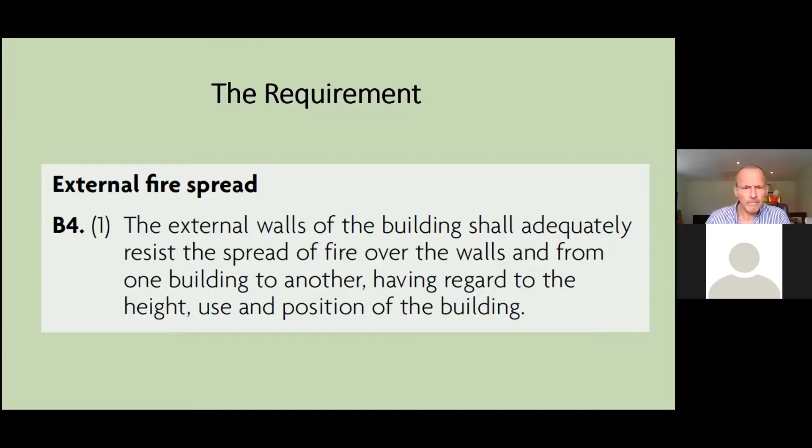I'll give my thanks to Les for sourcing and adapting this useful diagram that demonstrates the principles. Let me bring up a pointer here. It's useful to demonstrate: we've got a burning building there, and we've got some assumed fire loads and fire intensity, depending on the use of the building. That's either a reduced intensity of 84 kilowatts per metre squared for offices, domestic, assembly and car parks, or a standard fire load for shop, industrial buildings and storage of 164 kilowatts per metre squared.

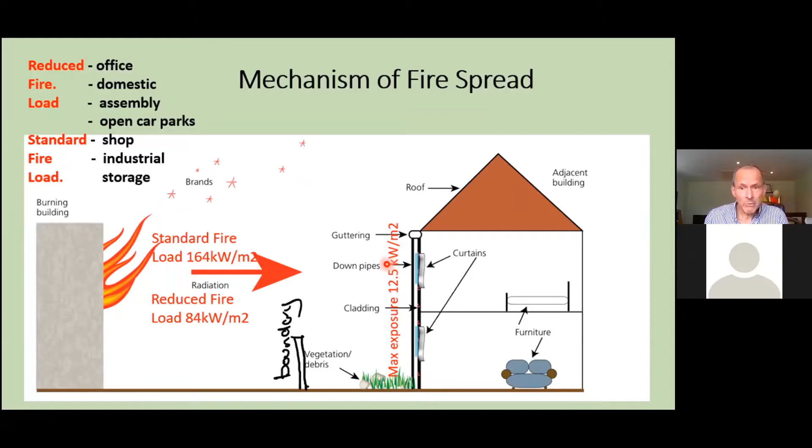The aim is to space buildings from the boundary to prevent radiated heat from exceeding 12.5 kilowatts per metre squared at the face of the opposing building. That's the theoretical heat intensity at which wood exposed to it will reach a pilot ignition temperature in about 10 minutes, allowing a burning ember floating over from the building on fire to start a new fire through pilot ignition.

Now, something important to bear in mind before we discuss the building regulations requirements relating to unprotected area limits, meaning limits on the total areas of doors and windows that face a boundary. When we specify a boundary distance based on Approved Document B guidance, we're basing it on an assumption about any building already in existence or that may be built on the adjacent site.

The assumption used has been that the two adjacent buildings would be identical, effectively mirror images of each other across the site boundary. In other words, the distance needed to the site boundary is the boundary distance A, which equates to half the separation distance, 2A. And 2A is the distance necessary to keep the radiant heat intensity at the face of the opposing building from exceeding that critical 12.5 kilowatts per metre squared limit.

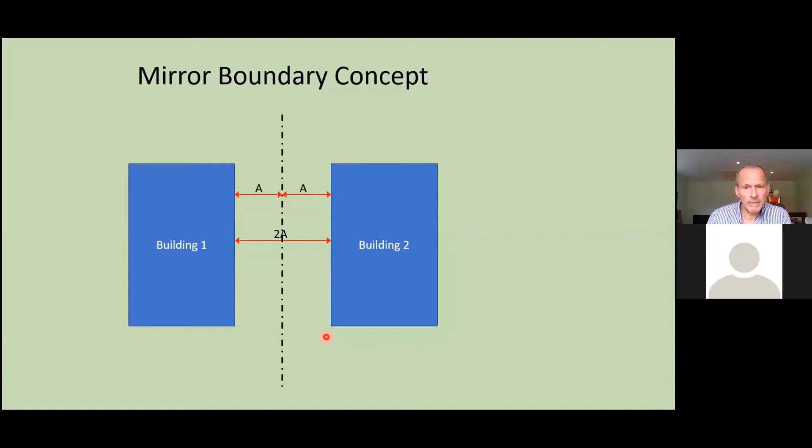So let's imagine a scenario where initially we get a small building, say it's a house, built on a piece of land, and the building regulations guidance based on the amount of unprotected area, i.e. windows etc, in that elevation facing the boundary dictates a distance of A from that boundary to comply with the regulations.

This is based on the premise that a similar scale building may be built on the adjacent plot with a similar boundary distance, so that at a separation distance of 2A, the heat radiated from a fire from either building will not exceed that critical 12.5 kilowatt limit at the face of the opposing building.

All well and good, but let's imagine a scenario where a few years later permission is granted for a much bigger building. We'll call it building 2, and taking an extreme, maybe it's a large warehouse with large volume fire compartments and a high fire load, thus requiring a greater distance to the boundary when referring to the national guidance.

The problem is that using the mirror theory, the separation distance, 2 times the boundary distance, works for the first building, but for the second building it's going to fall short of what is needed to restrict radiated heat from a fire in building 2 to 12.5 kilowatts per metre squared at the face of building 1. The building is too close. So whilst building 2 might on the face of it appear to meet the guidance, building 1 is now compromised in terms of fire safety.

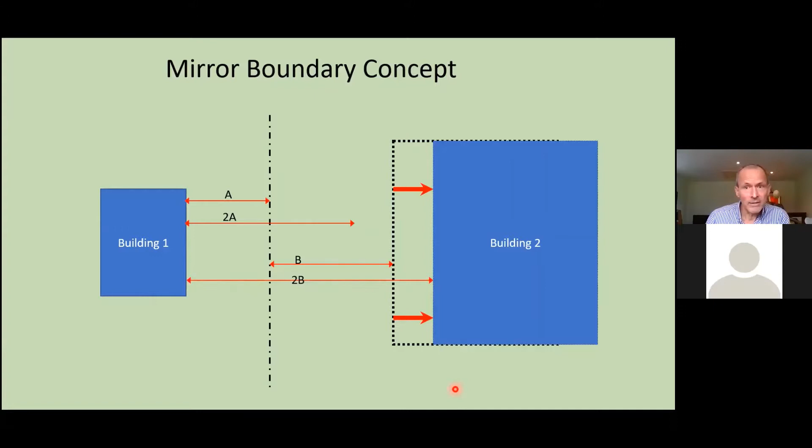So I hope that was reasonably clear.

Another anomaly I'll mention before we go into detail is that the rules we'll be discussing were based on buildings that were not as well thermally insulated as they are now. A BRE report commissioned by the government in 2015 advised that improving the levels of thermal insulation to those recommended by Approved Document L1A, Conservation of Fuel and Power in New Buildings, may lead to higher fire temperatures. These can be compensated for by reducing the unprotected area of an elevation by 70%.

70%, wow, that's quite a factor, isn't it? And it's worrying that nothing changed since that document was published, even though we recently had an amended approved document B published. So there you go. I don't know quite why there was no response to that report in the approved documents, but maybe it's still to come. We will see.

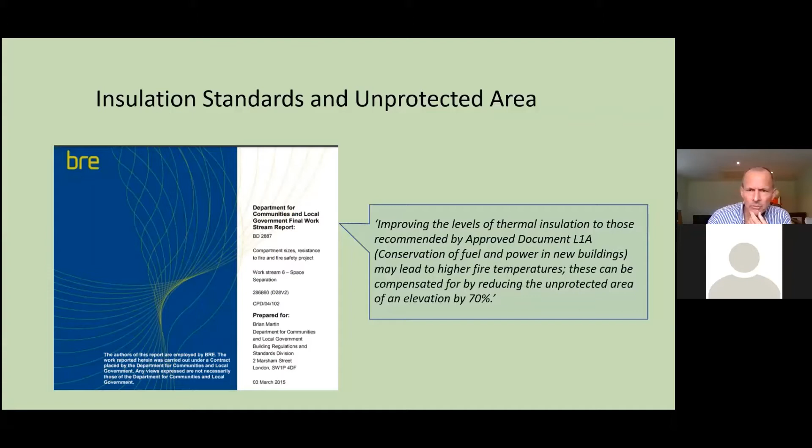All right, enough of background. Let's discuss the actual requirements that determine compliance. One of the first steps we take when checking a plan in accordance with approved document B, or the BS 9999 series, is to establish the fire resistance that's necessary.

Dependent on the height of the top story or the depth of the bottom story, and whether suppression by sprinklers is fitted to the building, we look at Table B4, the reference for determining the level of fire resistance needed. For example, Table B4 shows a dwelling house with a height not exceeding 5 metres has a fire resistance requirement of 30 minutes. The little symbol there relates to the need for 60-minute fire resistance for a party wall. So there you are - we work out from that table what fire resistance is necessary.

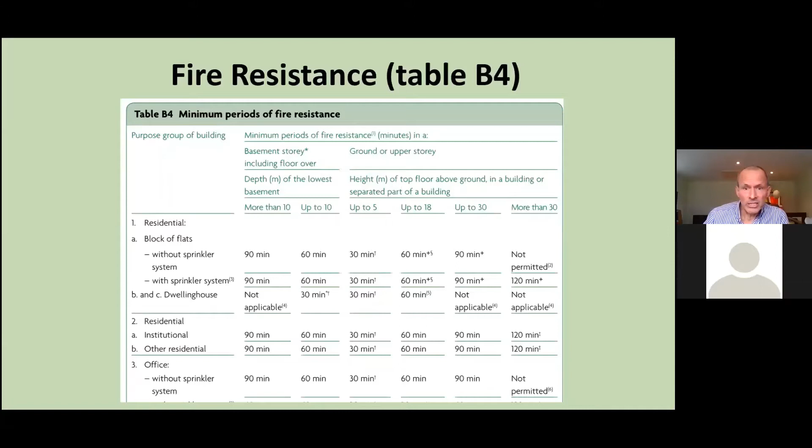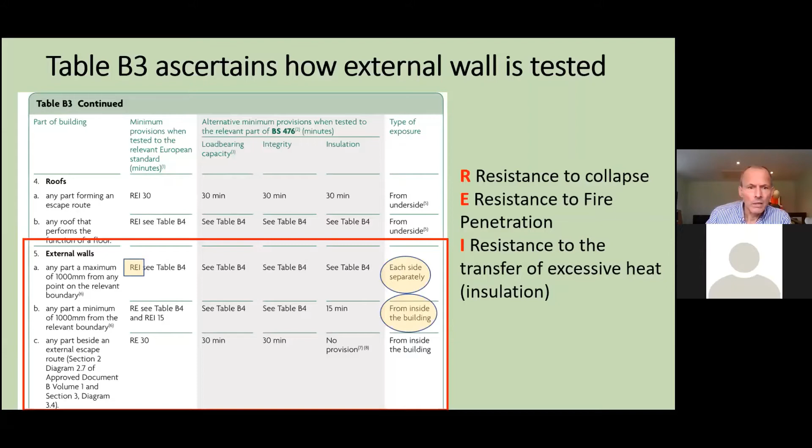So knowing that, we can now look at how we define unprotected area. I did say it's windows and doors in an elevation, but it's a bit more than that. It says that parts of an external wall with less fire resistance than the appropriate amount given in Appendix B, Table B4, are called unprotected area. We've just seen what the requirements are, so if you're not hitting those requirements, then we would call it unprotected area.

And even if you do hit those fire resistance requirements, clause 13.7 says where a fire resisting external wall has a surface material that is worse than B-S3-D2 and is more than 1 millimetre thick, then that part of the wall should also be classified as an unprotected area. However, we only use half its area when doing the calculation.

So you see there the B, S3, D2 rating - that's the Euro equivalent of Class 0 when we were looking at the old BS 476 Part 6 testing. The B relates to the combustibility class, the S is the production of smoke, and the D relates to the production of flaming droplets - the lower the number, the better. So what 13.7 says is that even if the wall has the required fire resistance, you still need to consider any combustible claddings and factor those in, allowing 50% of the actual in the calculation.

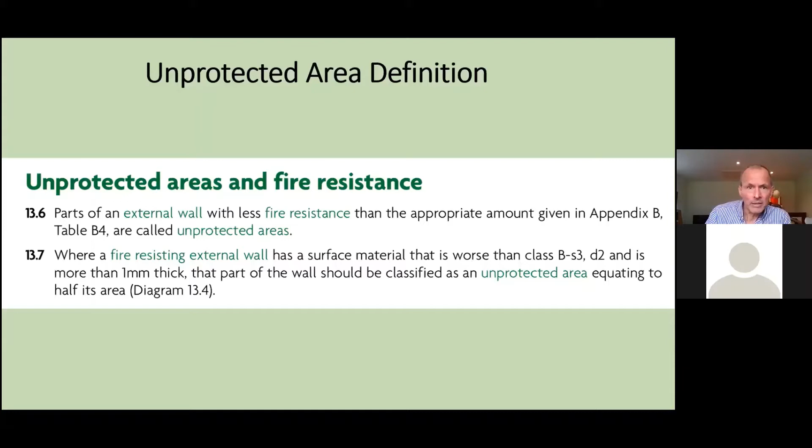So diagram 13.1 illustrates the methods that I mentioned in Table B3. In other words, when we're close to the boundary, we're looking for a very limited unprotected area, very small amounts. As soon as you get away from the boundary, then you can have a limited area of unprotected area.

And then there comes a point when you've got a distance whereby the whole wall can be unprotected area, no provision at all. I say that, but the wall might need fire resistance because it might be supporting a floor, so it might be an element supporting another element of structure that itself must be fire resistant. So you can't necessarily give no fire resistance to the wall.

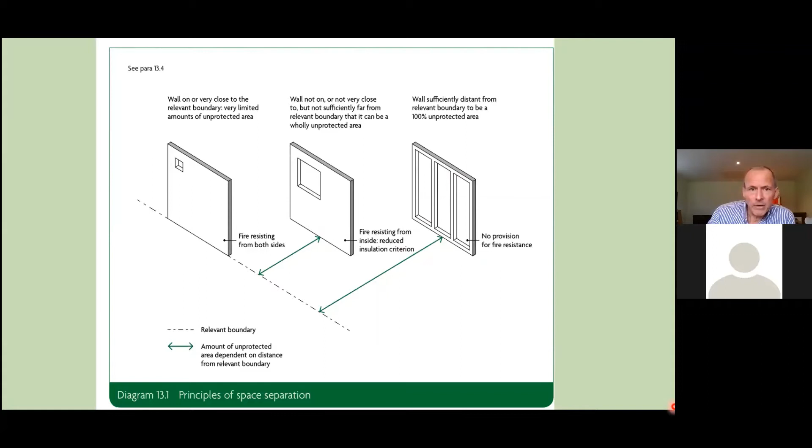Unprotected areas that can be ignored because we don't have to include every single window or surface as being a risk in terms of fire spread.

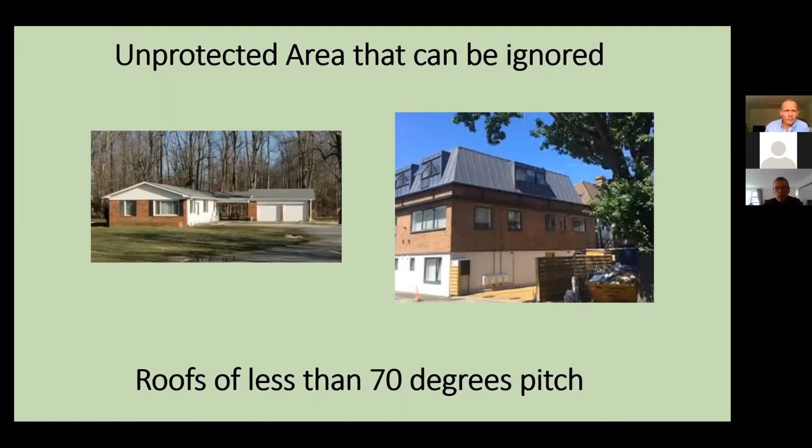This slide shows that roofs less than 70 degrees pitch can be disregarded, like the nice shallow roof bungalow on the left. Most roofs are at less than 70 degrees, so we don't include them. But occasionally we get a mansard roof like the one on the right, and because that's over 70 degree pitch, we have to include it in the calculation, along with those dormers.

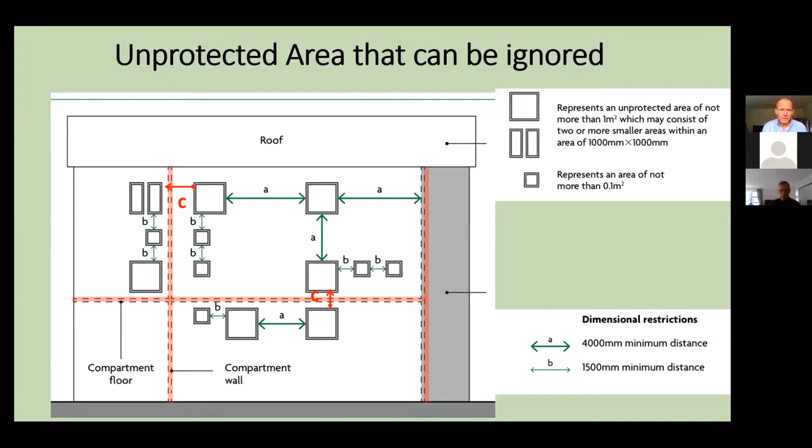Les is going to go into more detail on all this, but I'm just going to go through the simpler methods. There are 4 common methods for calculating the required boundary distance in the building regulations and associated documents. Method 1 is in ADB, just a simple table, relating to small residential buildings not more than 3 stories and 24 metres in length.

We've got method 2, also in approved document B. This is called the enclosing rectangle method, and that covers other buildings up to 10 metres in height, but excludes open-sided car parks — can't include that in that method.

There's methods 3 and 4 — 3 being based on BRE 187, an enclosing rectangle method that's slightly more finely tuned, and 4 called the aggregate notional area, affectionately known as the protractor method, that a lot of people know about but few have actually ever undertaken. You're going to learn about those in the following slides.

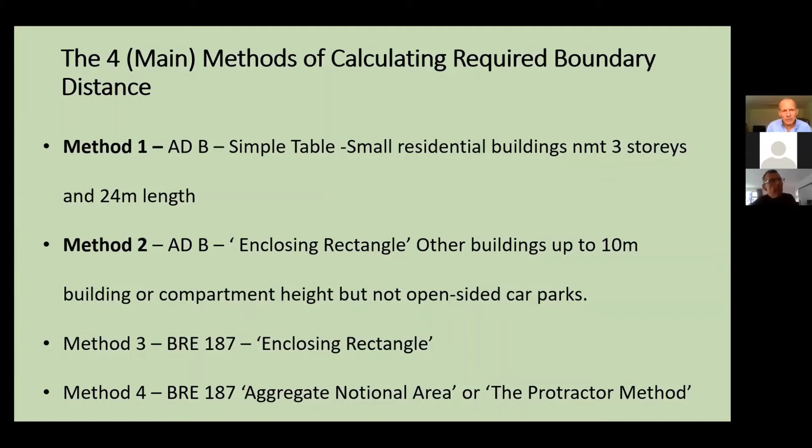So certainly when we're checking unprotected area in a design, we may check using method 1. If it doesn't work, we will use method 2. We might then ask the designer to present a method 3 or 4 assessment to demonstrate compliance.

Here's method 1, a really simple table. It's just a case of checking that the area limits in the table aren't exceeded, depending on how close the wall is to the relevant boundary.

So at 1 metre distance, you're allowed 5.6 metres squared. As soon as you get over 2 metres, you're allowed 12 metres squared, and so on until you get to 6 metres, where there's no limit on unprotected areas.

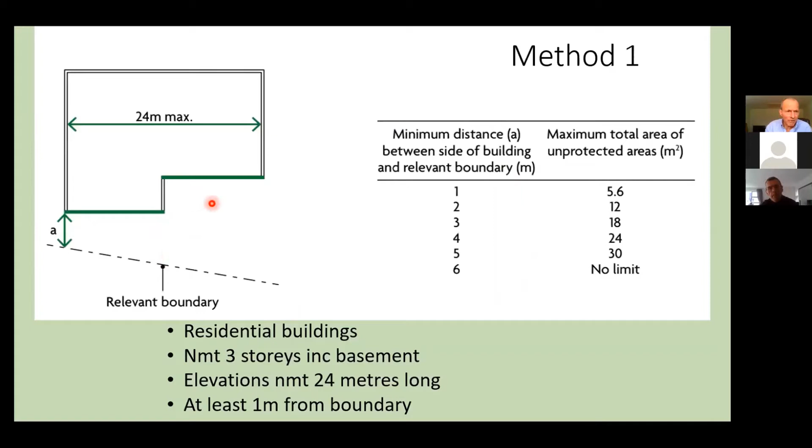You'll note the phrase relevant boundary, the minimum distance to the relevant boundary. The question is then, what makes that boundary relevant for consideration in relation to that elevation? I'll quickly go through a slide to show you.

For an elevation fronting a road, as a lot of people know, if it's a road, it may be a river, it may be a canal, there's not going to be any development there. So we can take the relevant boundary as being to the centre line of that feature.

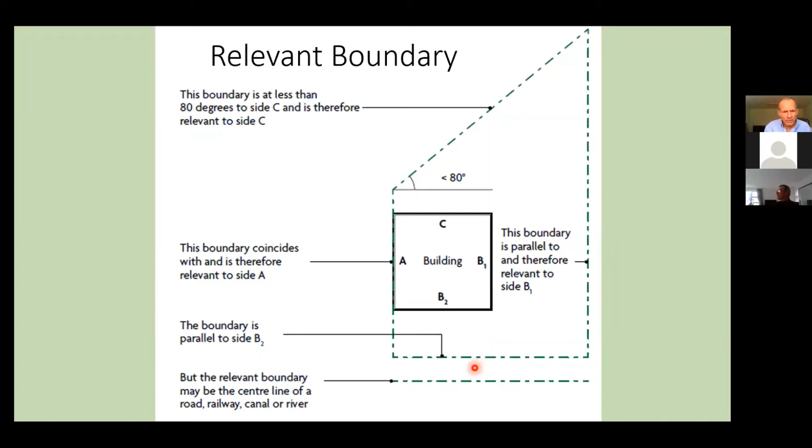You may have also heard the phrase a notional boundary, and we use that where there's more than one building on the same site. So not where you've got houses with distinct boundaries, but maybe it's an industrial estate or a hotel complex with outbuildings.

That applies when at least one of the buildings is within the residential or assembly and recreation purpose groups, or it's going to be operated or managed by different organisations. In those situations, we say a notional boundary exists, an imaginary line between the two buildings.

That line is set at a distance such that both buildings will comply with the unprotected area limit. In other words, it's within the allowable limits given for both opposing buildings, and as long as that's the case, the buildings will comply.

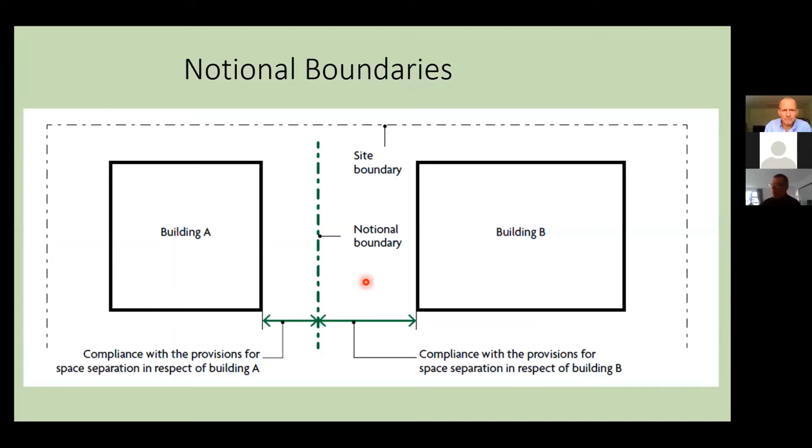In a domestic situation, it's often overlooked that these notional boundaries can exist, because you might have a non-exempt large shed or a garage over 30 square metres, controlled under the building regulations. Maybe it's a car barn—they're quite popular on housing estates now because they're compact space-wise.

If they're in proximity to the main house and don't achieve the minimum fire resistance, you might have to assume a notional boundary between them, as in this diagram.

In this case, it's a dwelling house with a semi-detached garage over 30 square metres facing the dwelling. So you have to run the calculation for that elevation, which might have a door area or something like that, so there's a risk of fire spread between those two buildings. As I say, occasionally overlooked.

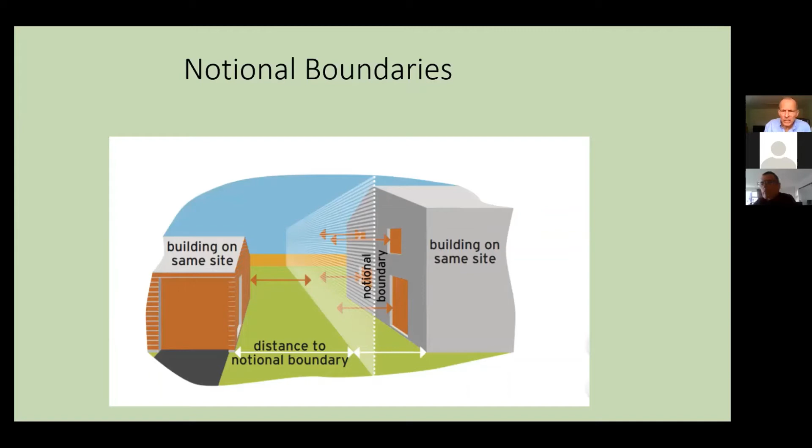And finally from me, method 2, which is in ADB, another relatively simple calculation process you might go to if method 1 doesn't show compliance or can't be used because the building isn't suitable for that method.

With this method, we look at the total unprotected area expressed as a percentage of the total area of the elevation. Then we've got a table in Approved Document B that shows the required boundary distance, depending on whether it's the lower or higher fire load.

So in this instance, we need 15 metres for the higher fire load, whereas we only need 7.5 metres for residential buildings, based on a maximum percentage of 60% of the enclosing rectangle.

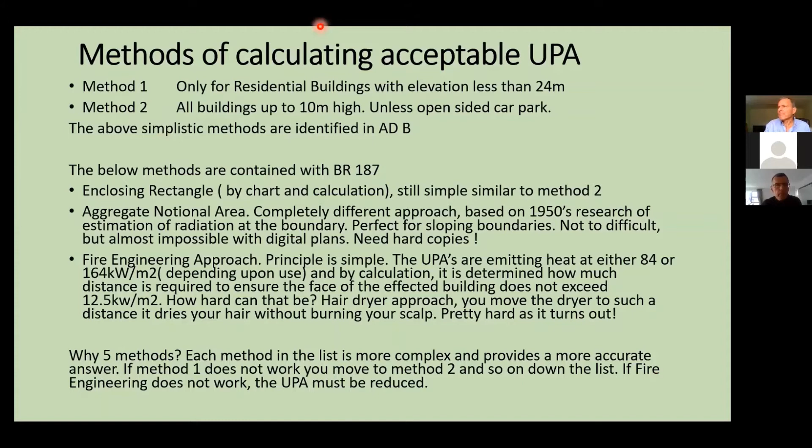Let's see if I can share this screen, Trev. I think that's half the battle with this. How's that, is that looking good? If you press run and then go to your slide, I think you're in business, Les. Can you see the... Sharing, yeah.

From current slide? Yes, I think if you run it. Is that up and running? Can you see the slide? Rachel, are you there, can you see the slide? We can see the slide. Yeah, I can see the slide. You've got all your screens down the side as well.

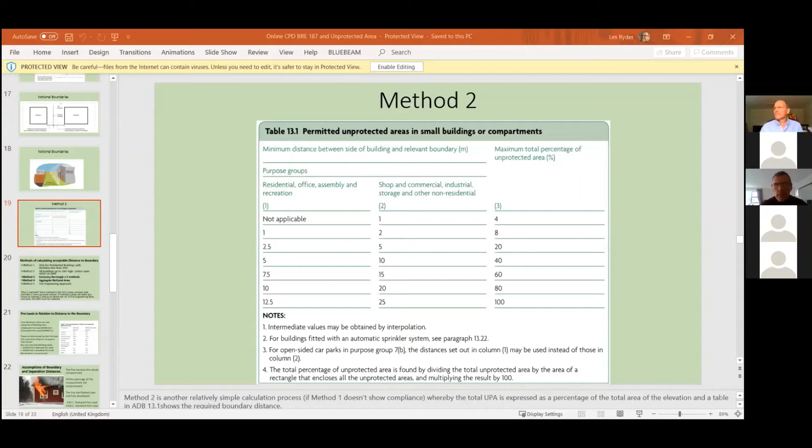No, it's not. Try clicking run slideshow, Les, and then hopefully we'll get started. Either that or, yeah, it says I'm sharing. You are screen sharing, it says that. Les, you might need to click the enable editing button first and then press run slideshow. I don't understand what you're saying because I've got... Did you see the yellow line at the top that says enable editing? Yes, click that.

And then go back to sharing your... I've got your screen now. So go back to share screen. Oh my God. Let's look, share. Yeah, looking good. And now do the slideshow. Is that it? Now go to slideshow and do what you did before to make it go. Make it go, and run the slideshow.

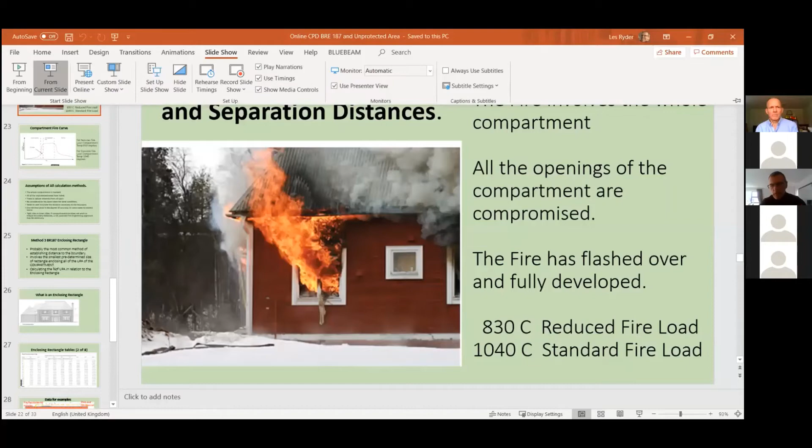See, it's so much easier on an iPad. Yeah, or from current slide. Click, yeah, slide, and I want to be clicking back, don't I? We're good, Les? Yeah, not as seamless as I had started to think, but we're there. I think you'll take it away. Brilliant, now I don't think there'll be anything more silky or smooth than that, Trev.

Right, okay, here we go. Let's see if we can get into the nuts and bolts of it. There you go.

Trevor's identified 4 methods, there's actually 5, which is crazy. But there's 3 levels of fire safety in ADB, BS 9999, and BS7, whatever it is, the fire engineering approach. So there just seems to be a habit of making - if they've got a problem, let's find 6 solutions to it, and unprotected area is one of them. We're going to concentrate on methods 3 and 4.

Obviously, I haven't got the expertise to run you through the fire engineering approach. But the reason why there's 5 methods is predominantly because, like what Trevor earlier said, you start off with method 1, and if method 1 doesn't work, you try method 2. And you're going to find out in a minute, method 2, nowhere in the world does method 2 work. I think they made a mistake on method 2, but we'll run through that in a sec.

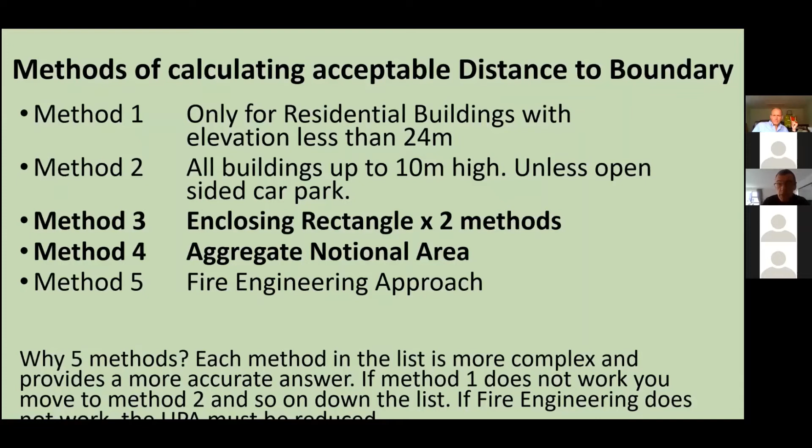You start in method 1 and you get all the way to method 5, and if method 5 doesn't work, then you've got to literally reduce your unprotected area. It's all down to fire loads, just the same as buildings - it's down to imposed loads, different imposed loads for dwellings, for shops, for flats, for industrial buildings. Fire loads is exactly the same, and in ADB terms they're related to the purpose groups.

Now, as far as separation of the boundaries is concerned, there's 2 fire loads that pertain. The first is the reduced fire load, and that relates to domestic, office and assembly buildings.

Open-sided car parks we just found out about a few days ago, and the second one is the standard fire load, which is basically what all the testing was done to. Those are the two heat fluxes that relate to each one. If you did the fire dynamics session a few weeks ago, you'll understand all about that.

And the missus has started cooking and using the microwave exactly when I've started to present. How good's that timing? Anyway, I'm fully embarrassed. That's job done.

Right, okay, well in the old days the purpose groups were designed in relation to kilograms of wood in the compartment, and the cut-off point for those two loads was 25 kilograms of wood in old money.

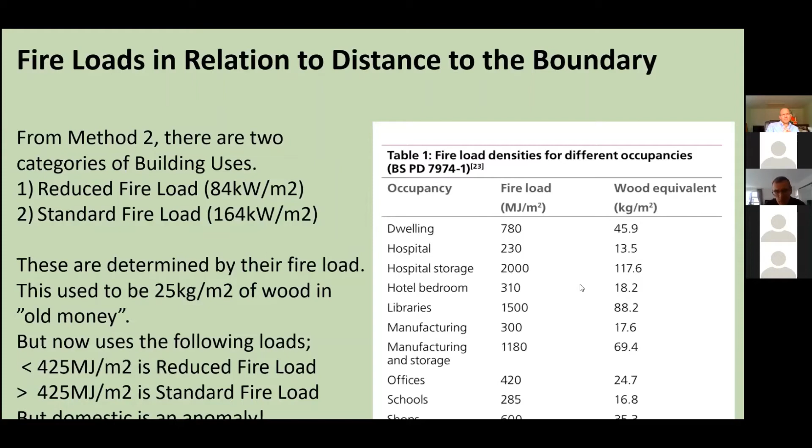But now, obviously, it's in megajoules per square metre. The cut-off point is 425 megajoules. Below that is a reduced fire load, and above that is the standard. There's a table that gives you some fire loads of basic buildings, to give you an idea. But the upshot is there's two different fire loads, and you'll end up with two different distances to the boundary when you do the calculation, and we'll identify how to split them.

The temperature for the reduced fire loads is assumed to be 830 degrees, and for the standard fire loads, 1040. But like Trevor said earlier about insulated compartments, all of the data we're going to use was developed a million years ago, back in the 50s, and all of the testing was done in concrete compartments. Again, if you've done the fire dynamics session, you'd understand the thermal inertia has got a lot to do with the temperature of the compartment.

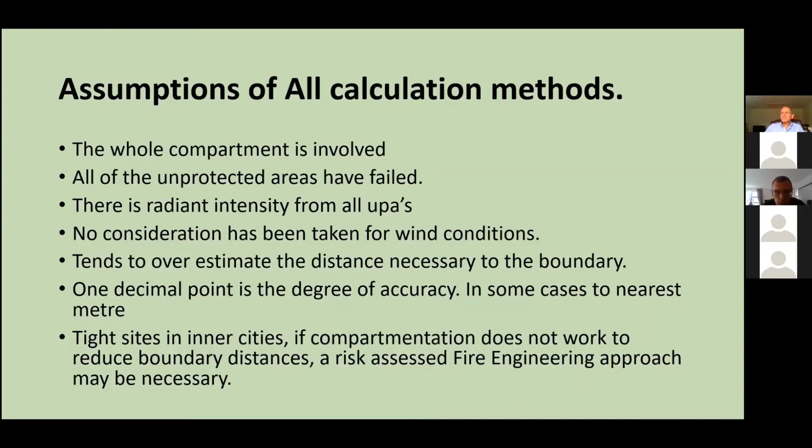So again, sprinklers can make a difference. We'll have a quick chat about that as well.

So what we're going to do, we'll do the enclosing rectangle method first, probably the most common method. It's been in there since 1965, derived from data in the 50s. And I've got to move Trevor's photograph out of the way - there you go, you're at the top right-hand corner now, Trev.

It involves the smallest predetermined size of rectangle enclosing all of the unprotected area of the compartment. Oh my God, I didn't even understand that when I read it. But you're going to get the idea.

It would have been a lot easier if I'd had my iPad, because I would have shown you a little bit. Well, the next slide, hopefully, with a bit of luck - I can't remember what the next slide is, but with a bit of luck that will identify that.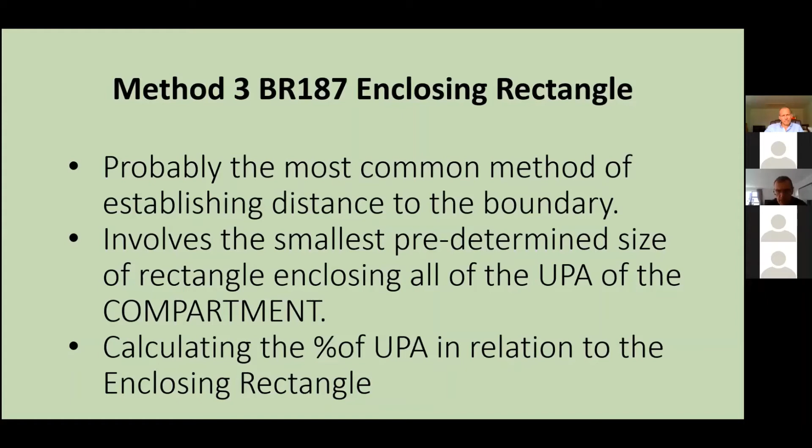And you calculate the area of the unprotected area in relation to the enclosing rectangle. So if you've got 1 square meter of unprotected area and your enclosing rectangle is 10 square meters, then you're at 10%. So it's relatively easy.

What I was going to do on this slide with my iPad was to actually draw where the enclosing rectangle, the minimum enclosing rectangle, would go. It's a rectangle that goes from the top left, the window on the top, on the left-hand side - that's a point - and the top right-hand side.

I think you could lose a pointer if you - I think if you go to your menu you could do what I did, use a pointer with a pen logo. If I lose this screen, who knows? No, you'll be right, just click that pen logo and you'll be able to. Can you see my iPad? Can you see my what they call point? Yeah, I can see that, but you could - yeah, go with that if you want. I might not get back in, Trev. That's what I'm panicking about. It's just a tool, but okay.

So it starts there - that's another point. It goes all the way down to the floor because of the door, and then back around again. That's the enclosing rectangle. It does what it says on the tin.

Now that's the minimum enclosing rectangle, but it gets a little bit trickier than that, because the rectangles we use in the tables are all at 3 meter intervals. So if that there is 10 meters by 5 meters - 10 meters wide and 5 meters - then the smallest enclosing rectangle that we're going to get into, and I have got some diagrams of this in case you don't pick this up, would be a 12 by 6 rectangle.

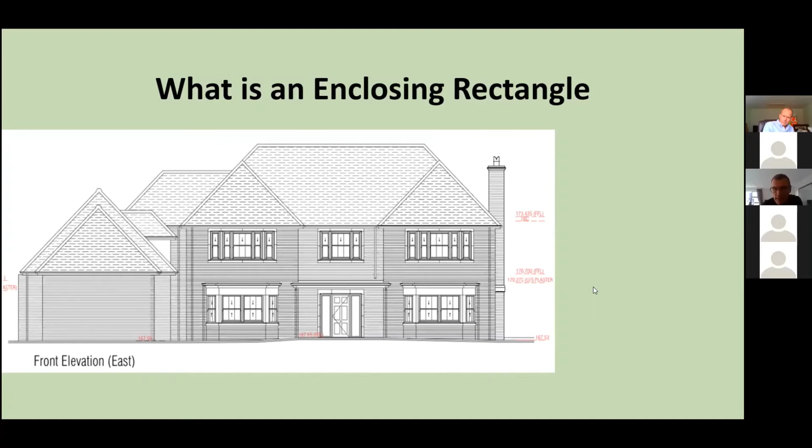I wish I had my pen. That slide was there specifically so I could do that.

Now, like I said, there are 2 enclosing rectangles. You remember that method 2 that Trevor showed you? Method 2 is just the enclosing rectangle around the unprotected areas.

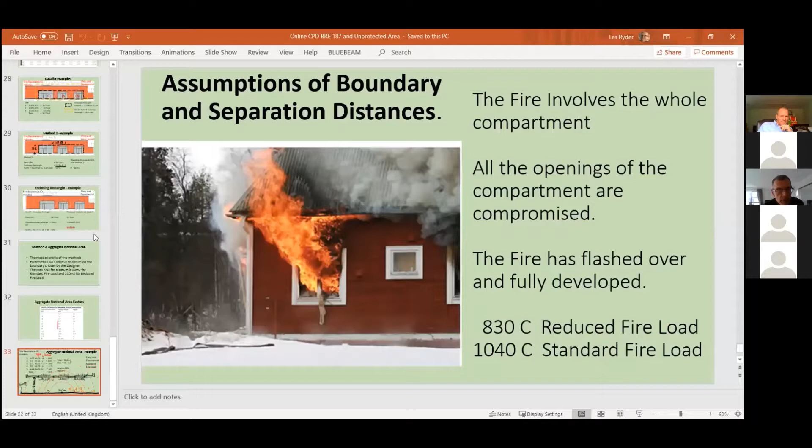Now, if we go back to Trev's slide - that wasn't supposed to happen. Where is it? Is it that? It's not that one, it's the one just before - yeah, that one.

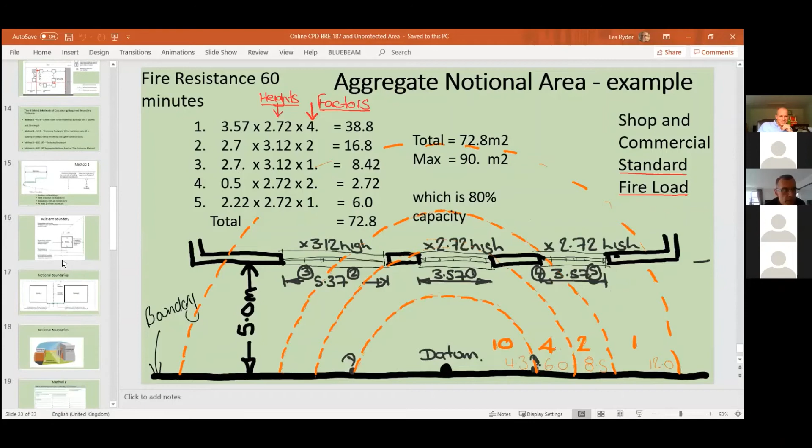Now, I think they've screwed that up, because what they do say is that the total percentage of unprotected area is found by dividing, etc. Now, that's what we've just done. That gives an insane amount of unprotected area. We're going to find out that doing it the other way gives about 40%, and that gives 10 meters to the boundary - still a lot more than what we're going to do.

We're going to ascertain from the enclosed rectangle. But I think they might have made a bit of an error on this method too, because it's insanely over the top, and I don't mean slightly over the top. I mean insanely over the top. Right, let's get back to our slideshow.

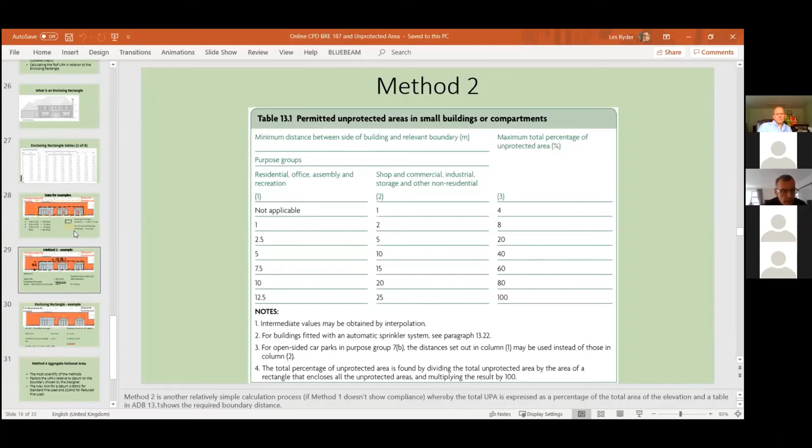From the current slide, we're going to go on to that table 13.1 in the approved document. That's given 22.5 meters to the boundary, which is absolutely insane, but that's what it says. Now what we're going to do is do it on the BRE 187.

Now remember our 3 glazing areas. Our 3 glazing areas are 1, 2, and 3. That gives 36.17 square meters of unprotected area. Remember our enclosing rectangle, the minimum that we could get round it. I should have drawn it in, but I thought I had an eye pen - I don't. Now that enclosing rectangle, the smallest enclosing rectangle on BRE 187, is 15 by 6.

15 by 6. Now I think I've lost some data off this slide. Basically, if we divide 36.17 by 15 times 6, we get 40%. And again, I should have changed this as well, because that should say 5 meters, not 5.5. I'm going to show you why in a second.

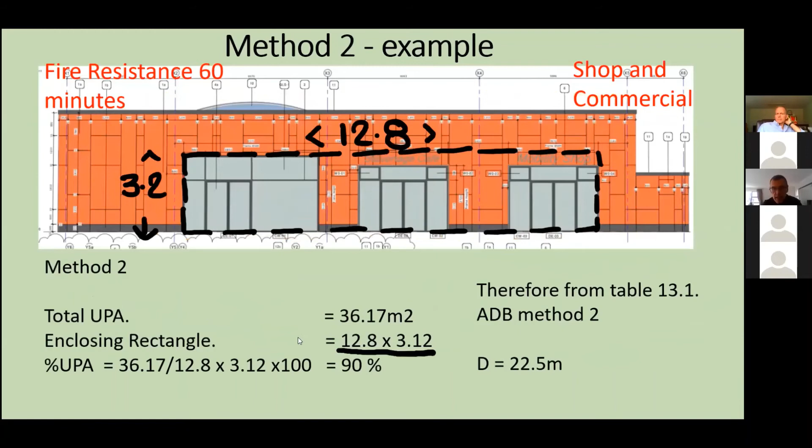So that's relatively how easy this is. It's just a matter of working out the percentage. You fit the unprotected area into the smallest enclosing rectangle that you can, and then make a percentage of it, like we've done there - like I didn't do there, but it should have been on the next slide. So that's effectively the enclosing rectangle in BR 187.

Les, can I chip in just briefly there, because it's a good time to mention this anomaly that I've often noticed and couldn't work out. If you had something that didn't comply for boundary distance, you could possibly make it comply by actually increasing the unprotected area so that it increases the size of the enclosing rectangle that will fit it in the tables, thereby making it comply. Do you see what I mean? Because I've tried that before, but the next table up takes that into account. So if, say for argument's sake, we couldn't squeeze it into a 15 by 6, we needed to squeeze it into a 15 by 8, then yes, the percentage would go down.

But if we went into an 18, in this case it doesn't make any difference, to be fair. So in this case you're 100% right - you could increase the size so that, you know, you could put a little bit of unprotected area that you had to forget about. And in this case it's not that critical, because you can see that the 40%, whether it's for 15 or 18 meters, it's still the same.

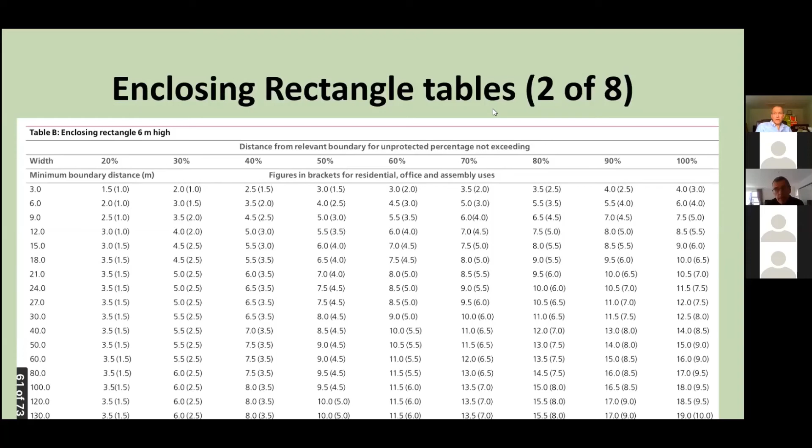So that kind of area, obviously, they're not too concerned about. But yes, you're 100% right - the 40% could then go down to 30 or less, going into the bigger enclosing rectangle. So just an interesting point - I think it's a case on all guidance that it doesn't take long to figure out there's a bit of a problem on this. And this method is even more prone to playing around with it, as I'll explain in a minute.

It's a little bit tricky to get your head round, but I was doing these in the 70s when my district surveyor might be out on the district, and he'll just say, oh, sort out the unprotected areas on this, and I'd have to sit and work them all out for him, because that's what I did. In those days, we never got taken out on site until we'd been sat in the office for 3 years, doing stuff like unprotected areas. So it was a common method in the 70s and the 80s. I can remember doing it quite regularly, but it lends itself more to hard copies of the drawings.

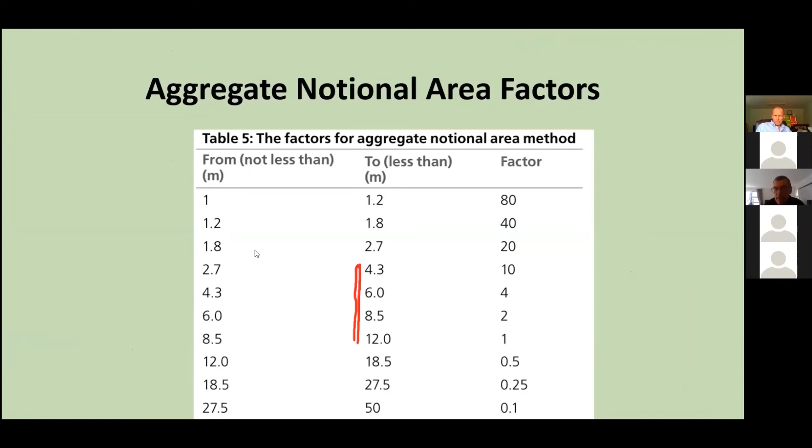So what it says is that anything less than 4.3 distance away from the datum, we've got a factor of 10. Anything between 4.3 and 6 meters, we've got a factor of 4. Anything between 6 and 8.5, we've got a factor of 2, and then after that we've just got a factor of 1. So now the designer can place this datum anywhere he wants, but he must move it 3 meters one side or the other and go through this process all over again.

Now, as you can see, the lines of the protractor actually cut the windows of the unprotected area. So if we look at the glazed area in the center, we'll see it all fits into factor 4. And that's 3.57 in that direction, and it's 2.72 high.

So if we go up to the table on the left, on number 1, which corresponds to number 1, we've got 3.57 times 2.72 high, and it's factored by 4, and that gives an aggregate notional area, that's where it comes from, an ANA of 38.8 square meters.

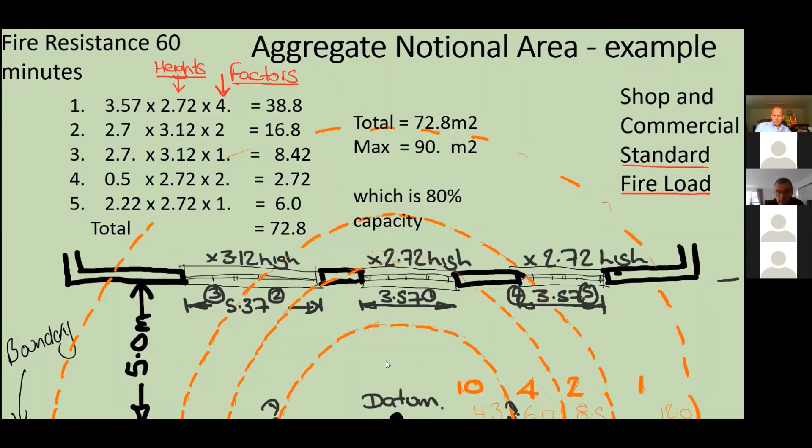So if the building is compartmented, you would treat each compartment separately. And that was actually the case here, because that's a mobility shop, that's a cafe, there's a compartment wall running down the middle, and then that's the bus terminal door, with another compartment wall there. So there's 1, 2, 3 compartment walls in this case, meaning the distances to the boundary could be very short. The 5.5 figure assumes there's no compartmentation.

The other thing they could do if struggling is sprinkle the building. If you sprinkle it, you can halve the distance. So if that building, for argument's sake, wasn't compartmented - as the example shows it actually is - and we didn't have 5.5 meters to the boundary, only say 3 meters to the end of the footpath, and then there was another building, sprinkling that building would halve that distance.

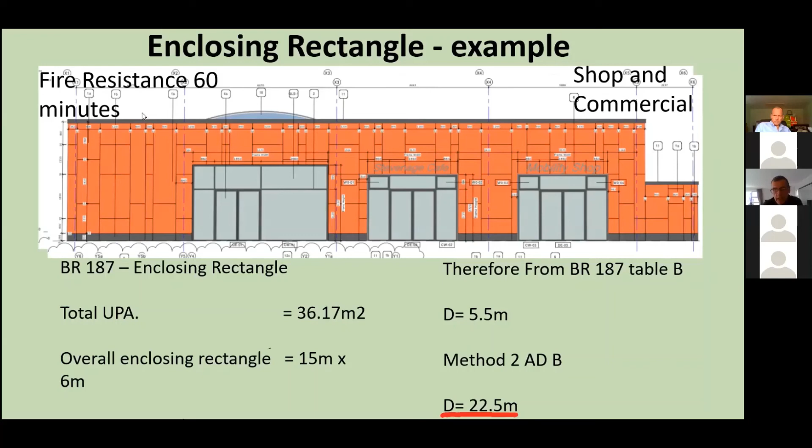The other way of looking at it is if you've got a standard fire load, and it's sprinkled, you can halve the fire load. You can do it in either direction you wish. But that more or less sums it all up. What time is it now? Computer's not working - 7:53. Yeah, that more or less sums everything up.

So it's interesting that areas of how fires actually behave don't necessarily reflect how we look at the requirements. Because if you looked at that, you'd instantly say it wouldn't be a bad idea to have 1 hour fire resistance on soffits and fascias, to make sure the fire doesn't compromise the unit above. But it doesn't work that way, and that's why the majority of high-rise fires occur - they just skip around the compartment walls and go from opening to opening, which isn't being considered yet. It's part and parcel of external fire spread, which can happen in a myriad of ways not controlled by the requirements or guidance.

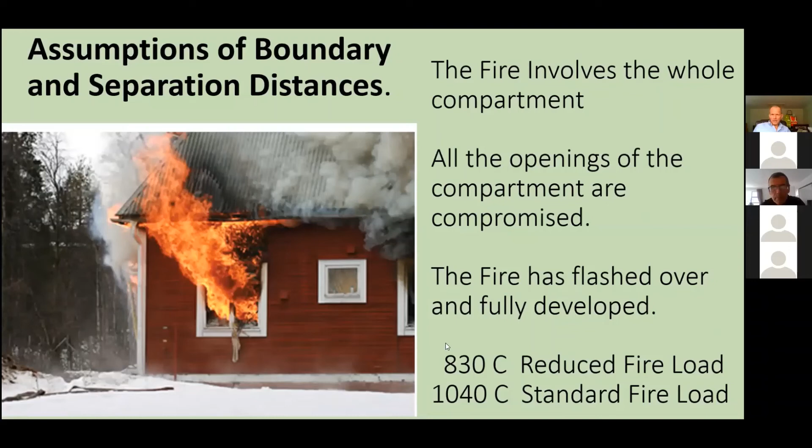Thanks for that, Les. Yeah, we went a little bit off piste there at the end, which is good, because that's a good point - fire spread across buildings is probably more critical in terms of life safety, and yet the guidance we've got to work with is so much more vague and needs to be sharpened up. We saw the photo I showed of the recent fire in Northchurch, and that's exactly how the fire spread - across the surface of the wall and up into the soffit - and it gutted 2 buildings as a result, even though they were compliant in terms of unprotected area.

So thanks very much, thanks for the deeper dive. I tell you what, you audience, you're a brave bunch - this was really advanced training for building control personnel, and I did say please hook into it if you're interested. I hope you found it useful, but my goodness me, it was taking it right up to the advanced level in terms of knowledge of unprotected area and the building regulation compliance issues relating to that.

So yeah, thanks for sitting through, hopefully it's not fried your brains. Thank you very much, Les, as always. It's great to rely on somebody like Les with that advanced knowledge. Of course, if you ask him, he'll admit that I taught him everything he knows anyway.